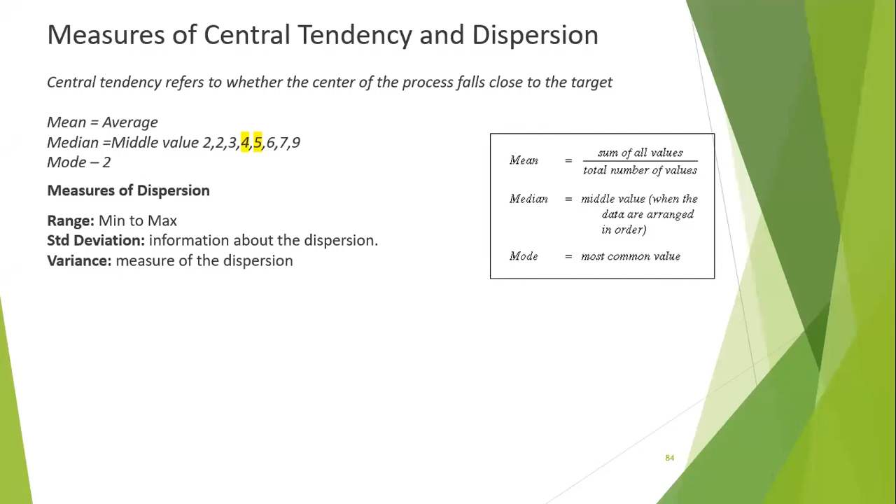Okay, measurement system analysis. As I told you, in Six Sigma level, taking data is a major challenge. They'll spend a lot of time on taking the data. That problem is not available for healthcare, because whatever report we are running, our system is capable enough to give you the report completely. That is the major advantage we have in healthcare.

See, whenever you take the report or measurement, accuracy should be there in taking the report. That's what, when you are running any KPI report, I usually tell you, you have to depend only on the software report. Nothing else, no lag report or something else you should maintain, because your software will not change, right? The report will not change forever. It will be there. For example, after 2 years, someone comes back and verifies your data.

There will not be any change. Your software will talk for you. That's the way our data accuracy should be 100% on this data.

And precision is nothing but, for example, the amount of variation in the measurement system when it is repeated. For example, I'm running a charge report for 6 months. If I run the same report 10 times also, the number should not differ, right? Why is it differing?

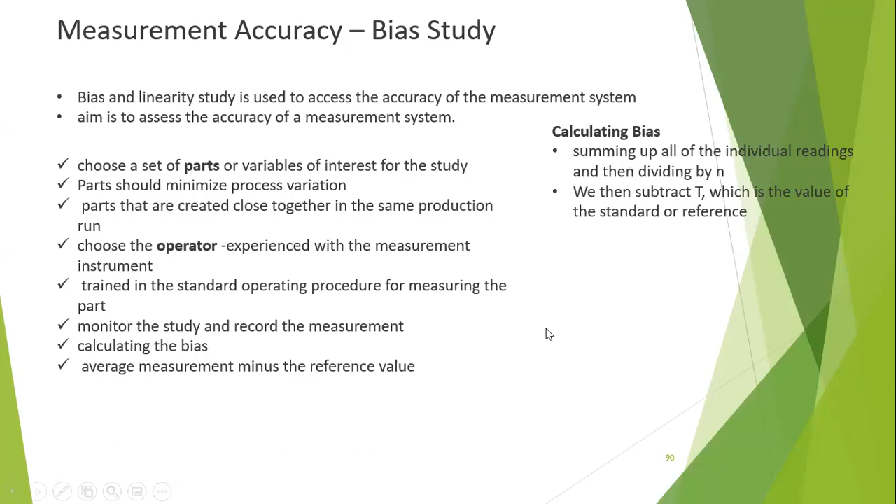Got it? So taking measurement is a very big challenge in all other industries except us.

Again, the step in measuring linearity. We talked about bias here; now we are going to talk about linearity. In linearity measurement, what we need to do is choose the part or the variable. Which part am I going to select, or which variable am I going to measure? And finalize which operator is going to do it, monitor and record what they are doing, and perform the linear regression.

Linear regression we are going to cover in future. In that linear regression, we'll identify what is the linearity and how we can avoid the difference.

Percent agreement analysis. Before we start taking any measurement, we have to come to an agreement on what error is going to happen and how we are going to attribute it. For example, this linearity is good for continuous data. What is continuous data? Numbers, right? Which can be divided and measured. For these kinds of data, linearity works better.

And for attributes data, percent agreement is needed. What do you mean by percent agreement? That's where we come to a conclusion, right? For example, I am going to measure what is red, blue, and green, or we are going to calculate how many pass and fail. As we know, that is pass, fail, and so on type of data.

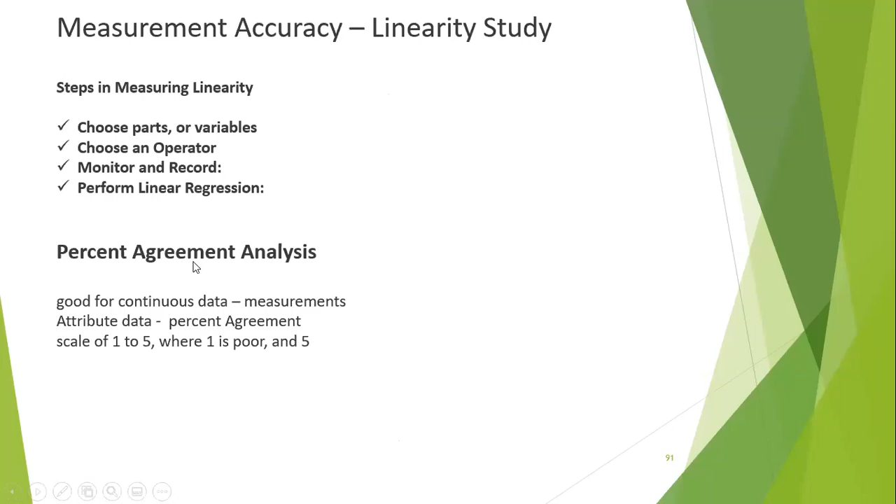Okay, any doubt here in this chapter? It talks about measurement. Okay, how we have to take the measurements.

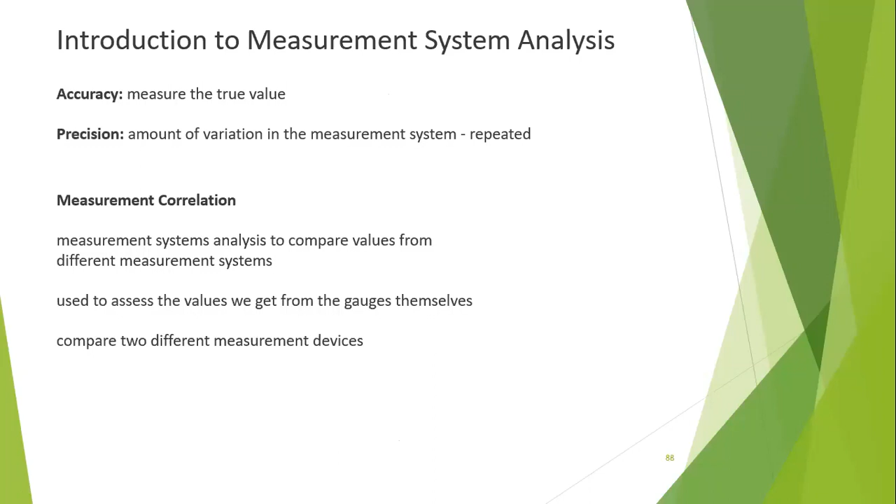Okay, I don't think so. We need to break our head too much on the measurement, because more or less it's not applicable to us. Right, performance and then process capability measurement.

This is a very big chapter, right? We discussed already, we discussed one time. Okay, component of the process capability.

So when you are going to define your process capability, you should know what is your specification limit. Customer expectation or business design, we already covered this, right? Specifications, you should know what is your specification limit. For example, I am taking an FTE model on the charge entry, so 120 is the specification limit. That is the customer expectation. And if it is payment posting, we know, right, 350 for EOB and then 1000 for EFT. That is our specification limit.

What is process spread? Extent of the process variation. For example, 120 is the expectation, my process spread is going from 70 to 150. That is your process spread, right? And process limit: natural process variation determined by the process itself. Process where it will limit itself, that is the process limit.

Coming to measure variability, how we are going to measure here is predictive measurement in the process performance. Based on the data we have, we do a predictive measurement and see how your process is performing, whether it is going to see any major changes or challenges. It's useful for designing, evaluating and optimizing the performance. It will be helpful to reduce your variation, and for measuring the process performance.

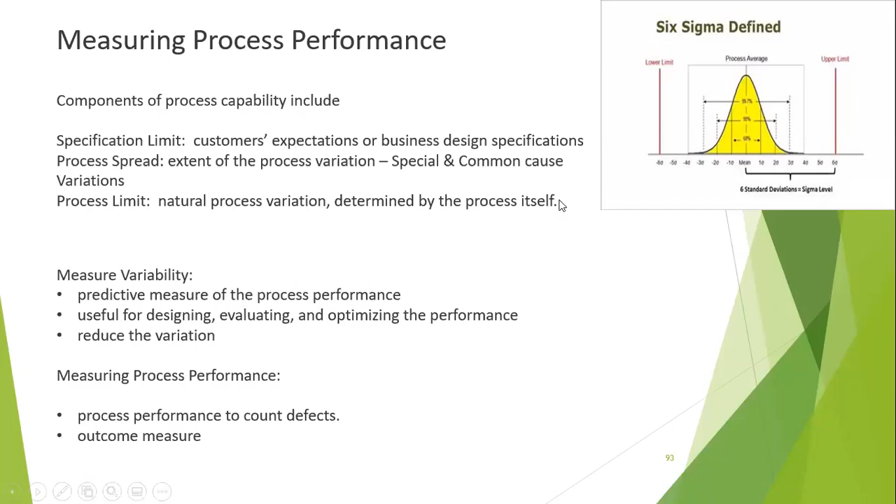Okay, this is a process capability study. There are multiple methods they use for checking process capability studies. This is the first one, a 5-key step. Determine the specification, as we discussed, we know what is the specification. 120 is my specification, and then we can do the process capability study and verify the assumption, to test the data is stable and normal.

For example, if a client is giving me a specification of 120 charges, is it possible, right? But that we need to do. We'll do a time study to confirm whether it is doable or not doable, because sometimes the client will come back and say we have to do 260 charges, which is not at all possible, right? We are doing the test to see if it's a stable number, able to achieve it, is it a normal expectation, or is it one of the noise points, one time we are getting it, other time we are not able to get it.

And the second thing is gather the data. For example, if I want to do the time study, I'll put 5 people and take a representative sample by the 5 people and calculate the capability. Determine the process capability and then calculate the sigma level. And based on whether the process is capable, we will make the recommendation. Once we identify the process is stable, we will give a recommendation to them, and we will go and fix that as our process capability.

Like that, we will fix it and verify the stability of the process. For example, now I did my time study and confirmed that 120 I can do. That's what my process capability we are declaring. Now, how do we verify it, whether it is stability of the process or it is differing.

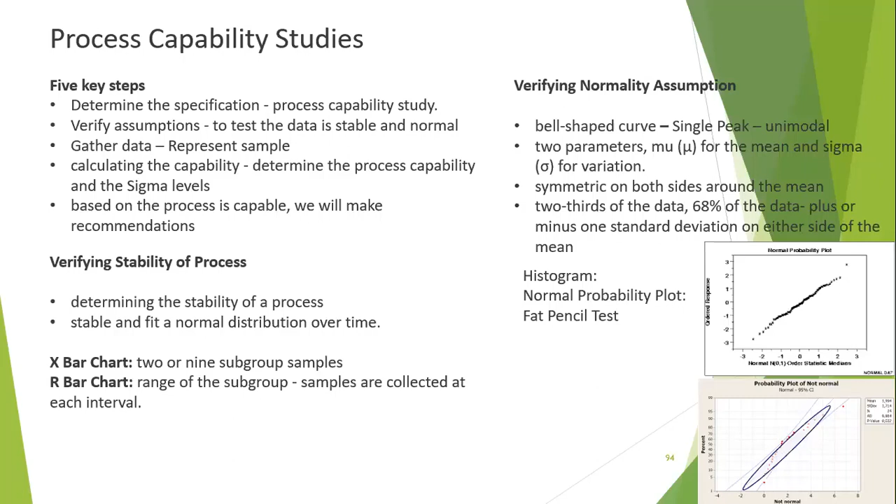Any question? No. No. Okay, we'll move on.

This is a major challenge. Here we are going to calculate our process capability. This we already covered one time.

Based on the process capability, for example, if it is 3 sigma, your number should be 1. If it is 4 sigma, it is 1.33. If it is 5 sigma, 1.67. If it is 6 sigma, it is 2. So how to calculate? This is the formula.

Upper limit minus the lower limit divided by 6 sigma. So here the CPK, right? CPK is nothing but what is your process capability. So there's an upper limit and a lower limit.

One is upper control minus mean divided by 3 sigma. The reverse is mean minus lower control divided by 3 sigma. And then we are going to take the min of CPU and CPL, within these 2 numbers, whichever is the minimum one, that is your CPK, right?

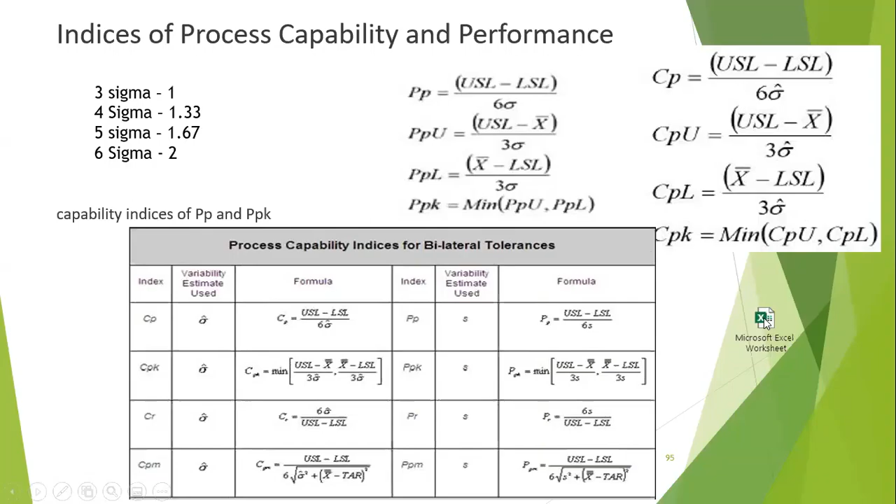So we'll see, I have some table here. We will go through that in depth.

So I had taken some of the projects to explain you what we are doing here. For example, on the day also we did the same. So we are going by the production. We are taking the charge entry as a production measure. Charge entry production is a measure, and then we are calculating for a complete month. So this is the charge entry number.

So what we are doing here is we are taking an average of this particular number. This is your average, and we are calculating the standard deviation for this particular range. Our average upper limit is, if you take the max of this, that is the upper limit, and if you take the lower control limit, it is the minimum, we are taking this. This is not LCL, this is the lower specification limit. So based on that, we are going to calculate the CP.

What is the formula for CP? It is upper control limit minus lower control divided by 6 sigma. So this gives upper control minus lower control, which is 120 minus 70, divided by 6 into your standard deviation. If you calculate, your number is 0.58. So 0.58 is coming in which category? 3, 4, 5, 6 - in which category is it coming?

Yara, what's the solution? 3 sigma. One is 3 sigma. Are we getting 1? 0.58. It's not even 1. So you are at 2 sigma level.

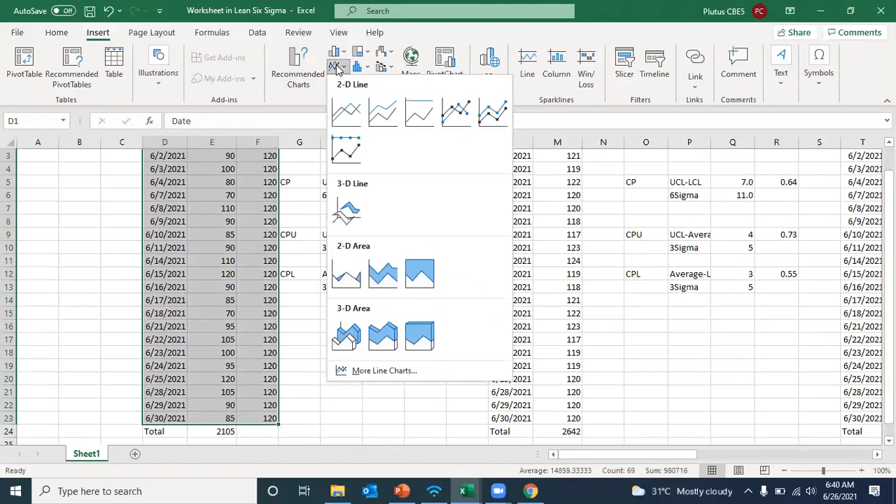The same way we will add one more table here. What is the average? Now we'll take this into the same picture. Now you can understand what is your variability. See, this is your variable, your 120, how he performed.

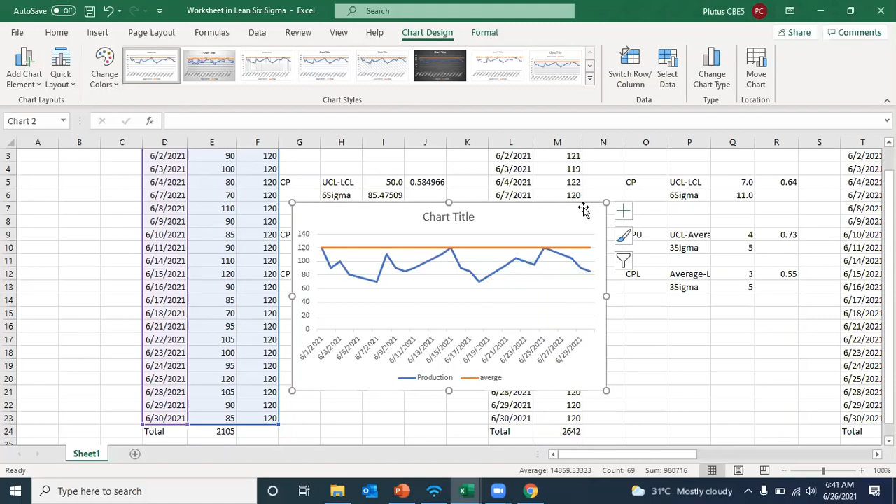Whenever you are getting a lot of deviation, your process is not stabilized, and you cannot commit your process saying I will give 120. I have 3 people, you cannot strongly commit to the management saying I will give you 360, because your process is not capable. This will give an indication whether your process is capable or not capable. This is what we need to identify, and your deviation should be controlled. That's what we are trying to show here.

For example, what we did here is whenever your deviation is getting reduced, standard deviation, see 2.5 you are at 4 sigma. When it is reducing to 2, you are at 5 sigma. When it is still reducing, you are able to reach 6 sigma level. So if you want to stabilize your CP, you have to concentrate on the lesser deviation. Now we'll come to that CPK, which is upper limit and lower limit, the same thing which we are doing here.

The formula we are seeing here is: UCL (upper limit) minus mean, divided by 3 sigma. That equals your upper limit minus your average, divided by 3 sigma level. Now we are getting 1.3. The same thing for lower control limit, your average minus LCL, divided by 3 sigma, which is 1.33. You have to take the minimum of it.

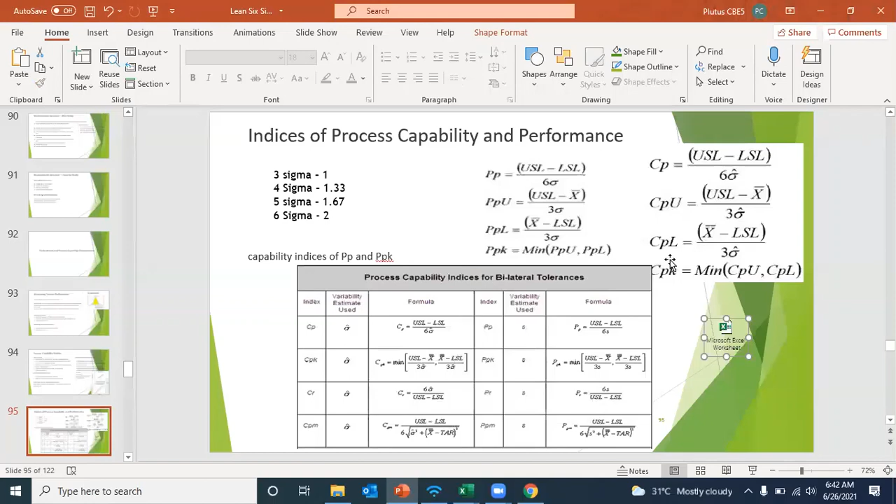If, for example, as a manager you want to take 1 week leave, you calculate your process capability, CP and CPK. If CPK is coming above 1.2, you can take 1 week leave confidently. If it is 0.58, you cannot take leave. So whoever wants to take leave, you have to come with CPK hereafter, with scores also - CP and CPK score for your production level.

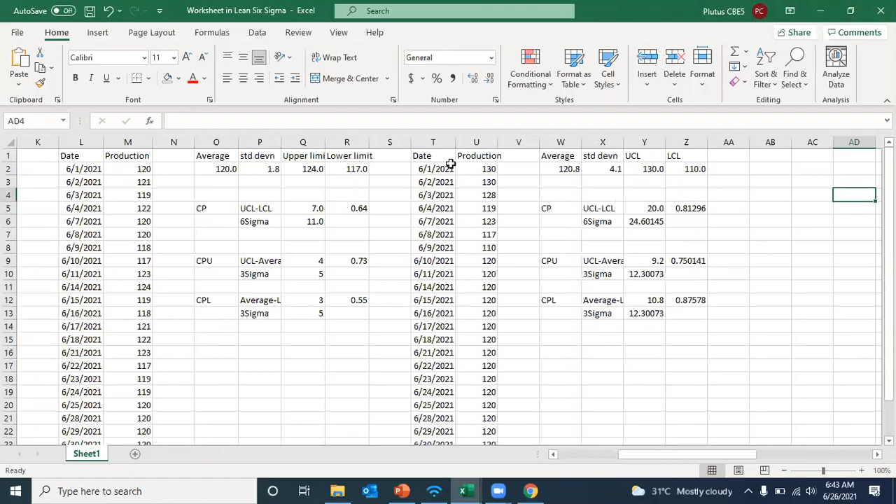So the same thing, right? There won't be any variation at all. The same thing you take here. What we are saying is 2 is your 6 sigma level, you take 0.5 variation. This will come around 9 or 10 sigma level. Even if you keep 1, here 3.3, which is 8 sigma level.

The variation is very important. For example, if you ask your team to run, they should run in a straight line. That's the way your process should go. That deviation is a problem, right? That's where we are struggling, that's what we are trying to explain here. So deviation is our major challenge for any process.

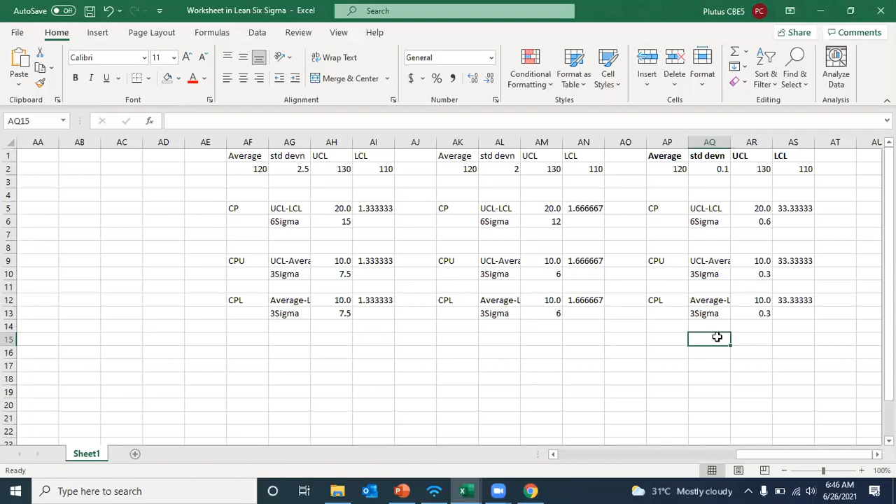See, multiple processes, for example charge entry, payment posting - many processes, if you process everything under your process capability, then there won't be any deviation. No one will be able to identify you. It will go smoothly without any intervention. That's the way we have to run this.